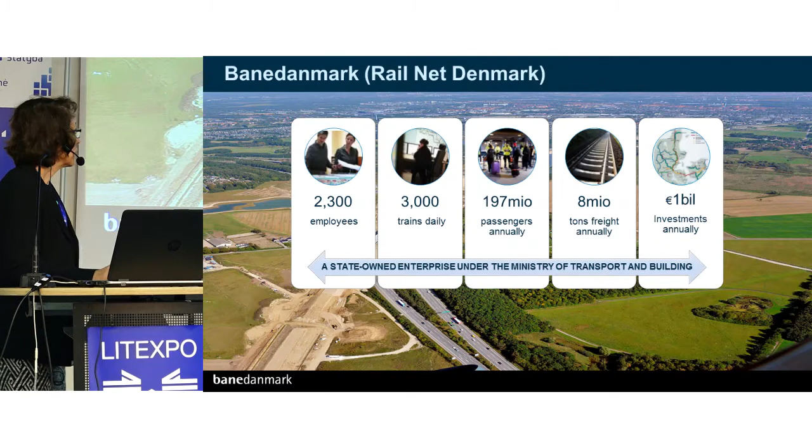First of all, a little bit about the Danish RailNet. It is a state-owned enterprise under the Ministry of Transport and Building. We have 2,300 employees and investments of 1 billion euro annually.

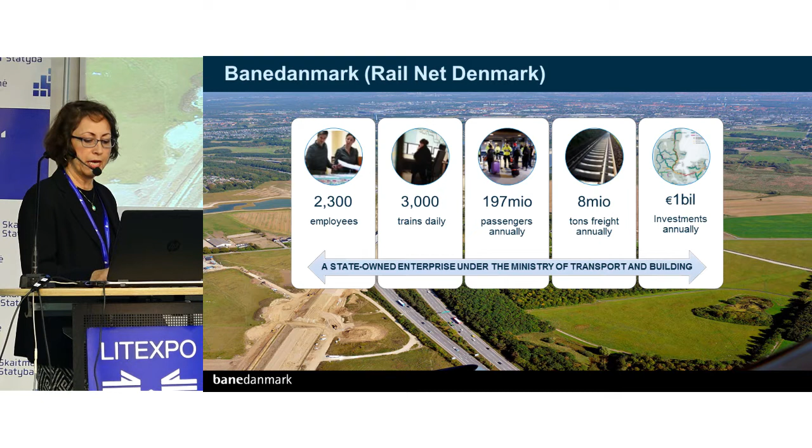We use the investments to make speed upgrades, new lines, and capacity expansions. Part of our railway is not electrified, so we have a contract to electrify the rest of the lines. We also have a completely new signaling system being established across the whole RailNet.

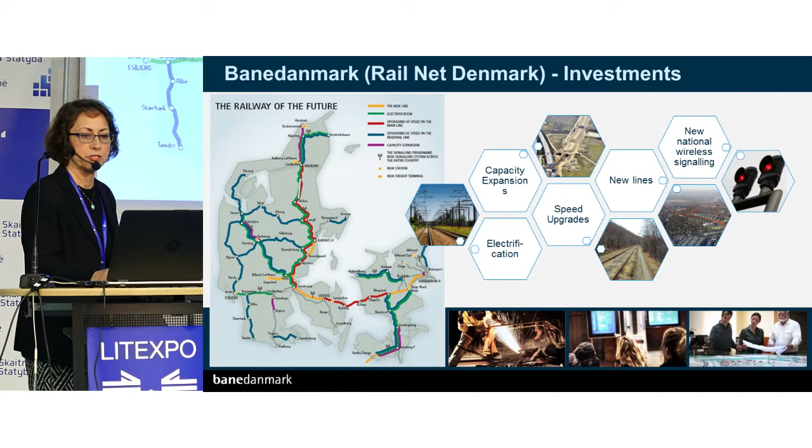One of the new lines was between Copenhagen, the capital city of Denmark, and Ringsted, which is a hub for the railways. It is the first time in many years we've made a new railway in Denmark. It is approximately 60 kilometers, dual track, electrified, high speed, 250 kilometers per hour. We have 4 tunnels, 88 bridges, and lots of earth to be dug.

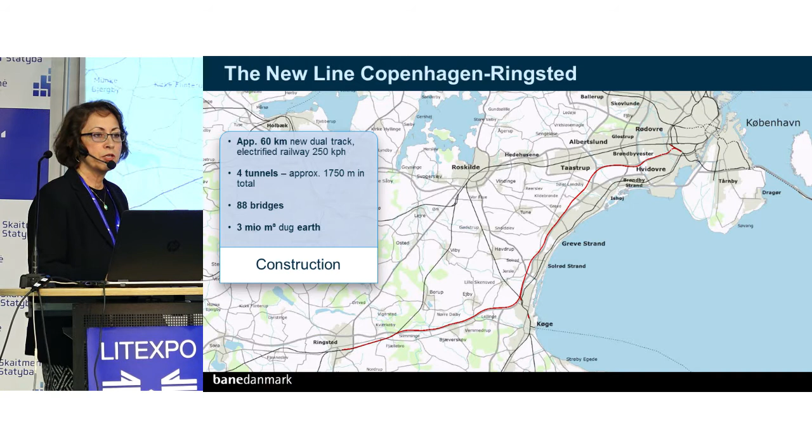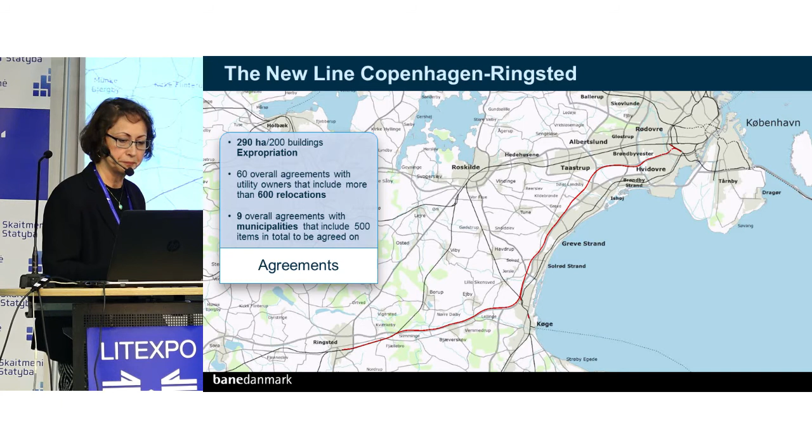We go through 9 municipalities, with lots of agreements with them, utility relocations, and lots of buildings to be expropriated. The only stop we have within these 60 kilometers is a new station, and then we have some platform works at both ends of the line.

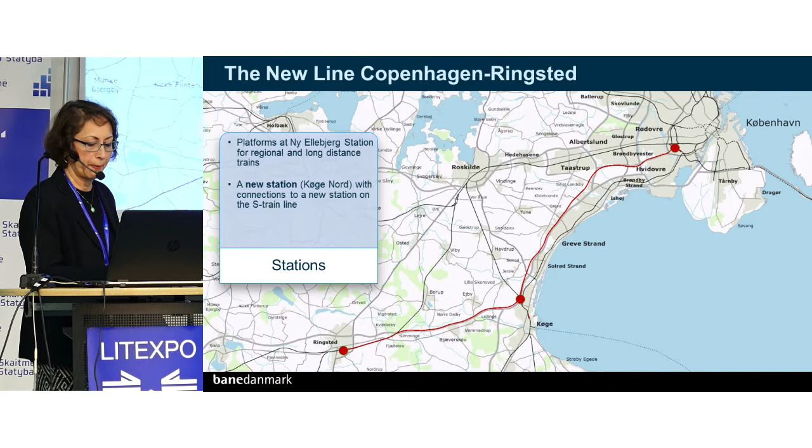The time schedule for the project: we started in 2010 with the Construction Act, and we have invited the Danish Queen on December 8, 2018 to open the rail. We have a budget around 1.4 billion euro. Today we are finished with construction works.

We have laid the tracks. Tomorrow we have a test drive, the first test drive of the whole line. Then the catenary and signaling systems are going to start now. We count on using most of 2018 for test and commissioning.

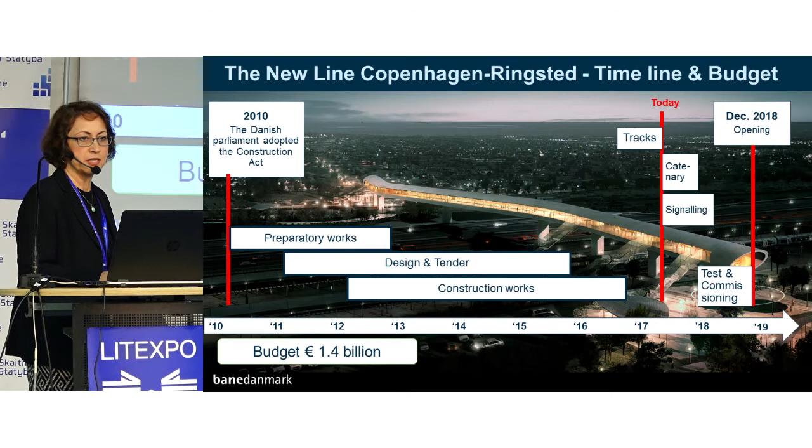When we started the project, we had a vision. We wanted to construct a new line, European and best-in-class, by purchasing in a competing market. We wanted to use the economy of scale and state-of-the-art technology. How to do that?

In many cases, we were first movers. It was the first high-speed line in Denmark. It was the first time we used design and build contracts, and the first time we used contract after negotiation in that type of project. It was also the first time we required exchange and delivery of intelligent 3D models through all stages.

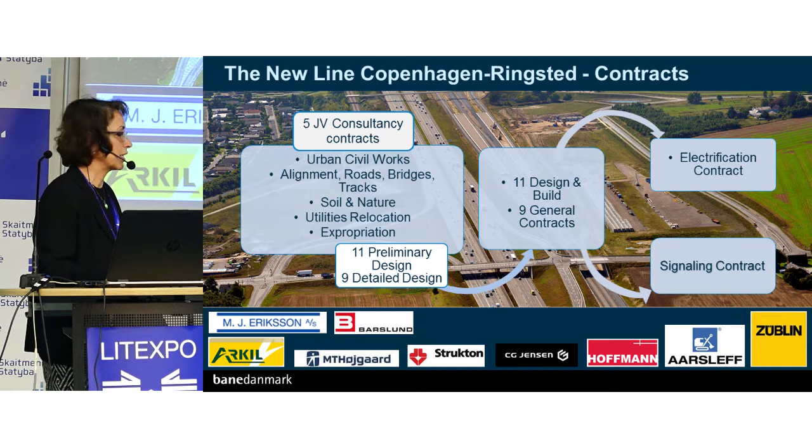Out of these 5 joint venture consultancy contracts, we got 11 preliminary designs in order to make a tender for 11 design and build contracts, and 9 detailed designs for 9 general contracts. Then, at last, the electrification contract and signaling contract took the material over to do their works. As you can see here, many of the major contractors are involved in the project.

The challenge was, when you have all these different companies delivering data to you, how are you going to manage that data? Are you going to ask them to work in a specific product? We didn't do that. We said, do what you're best at, but use the standards we have defined in order to exchange the data.

We made a CAD manual where we defined our standards. We made some automated processes to control the quality of the data delivered. We gathered all this data in our document management system, ProjectWise, and made some intelligent models out of it, iModels.

Out of this information, we were able to do all these different extractions from the models, making clash detection, visualization, exporting to our GIS system, quantities, setting out data, and drawing production. Everything was based on these models.

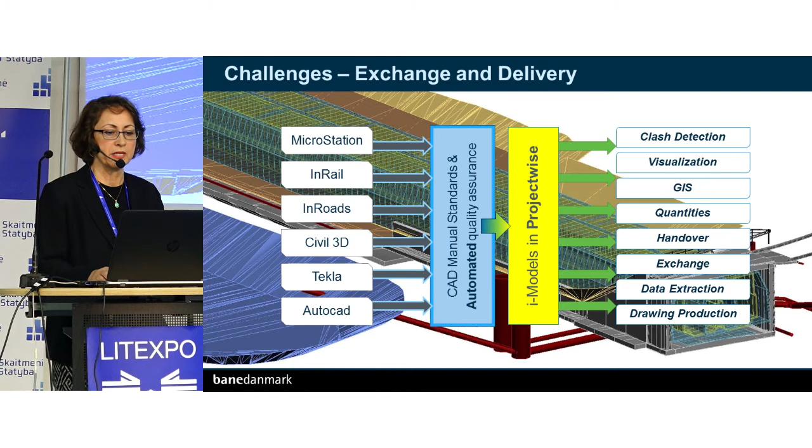Using this one source of data, we were able to do all these things, ensure consistency between the models, and ensure that the volumes were as they were to be defined. We used them for different purposes too.

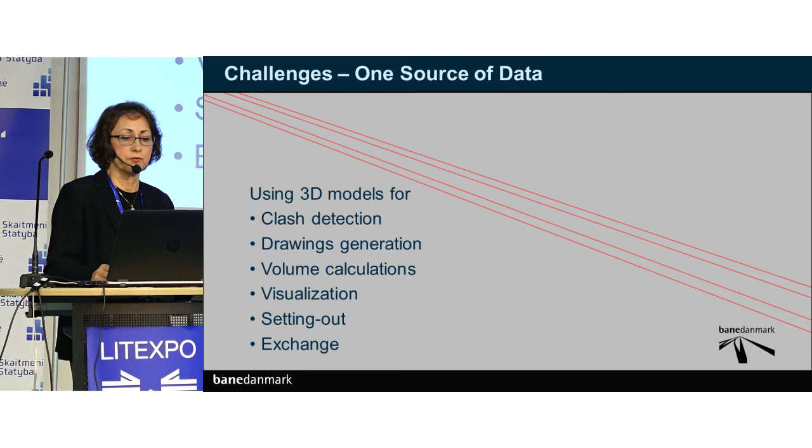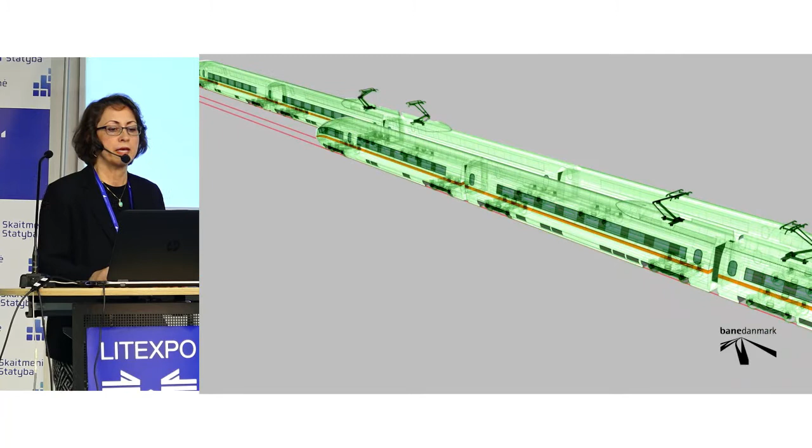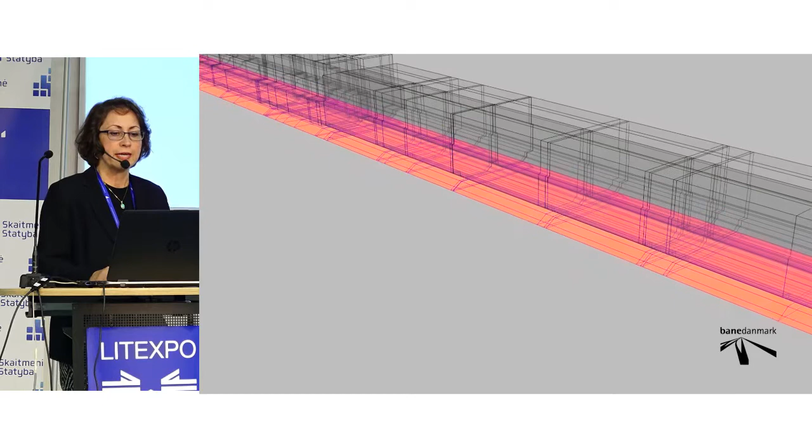The alignment of the railway was the center of everything. Around this alignment, we defined the minimum infrastructure gauge, which gave us the possibility to have free passage for the trains. Around this gauge, all the models were defined for utilities, for structures, for different types of structures, and earthworks.

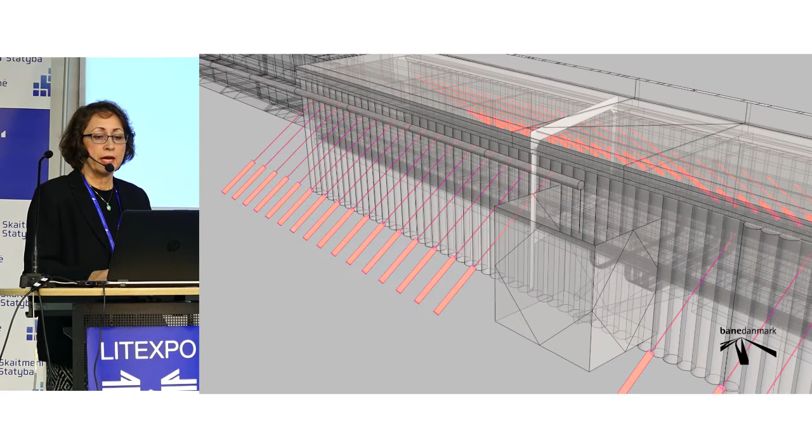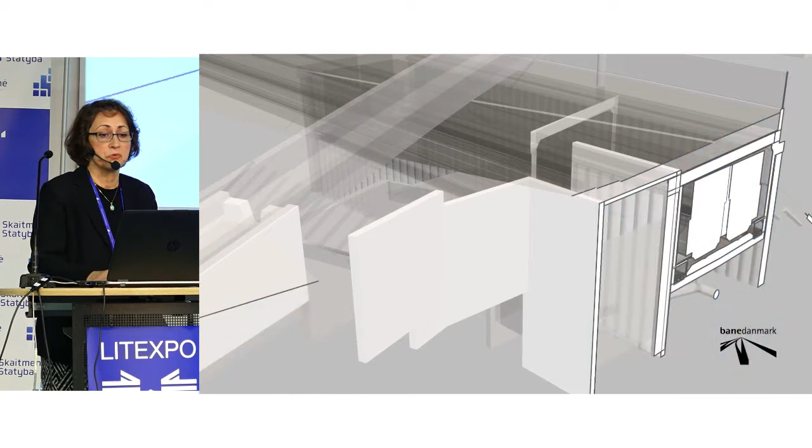When we gather all these models together, we are able to make any kind of analysis. One of them is to generate the drawings, make sections, and produce drawings from the 3D models, and use the same models as well for making visualizations.

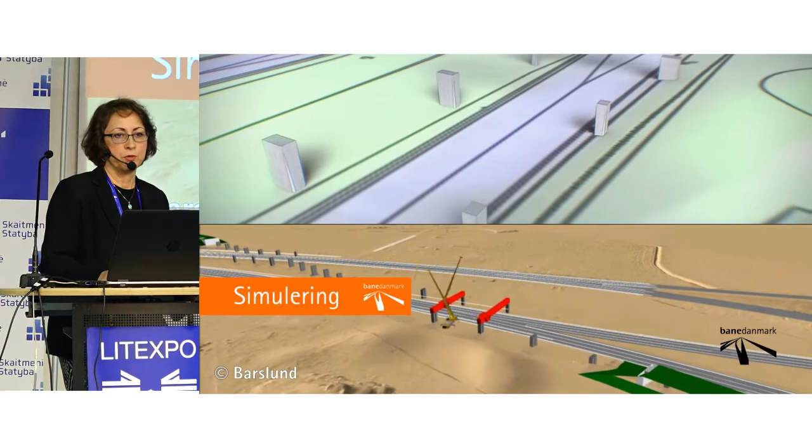A challenge is complying with time and budget in that type of projects. Having these 3D models, our contractors were able to make simulations of the building process and optimize their processes.

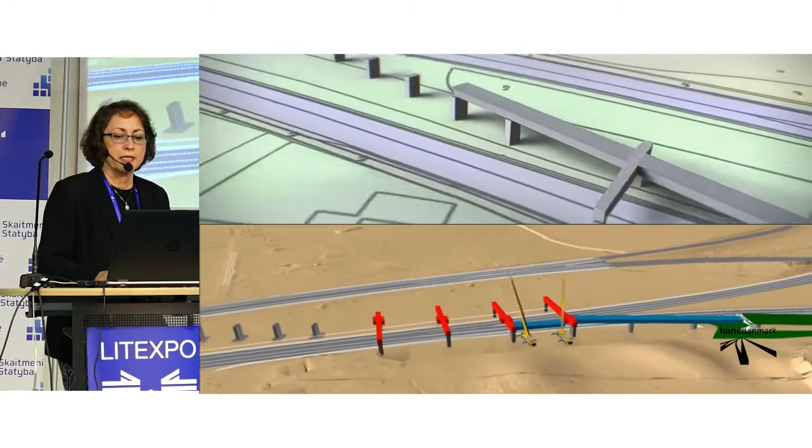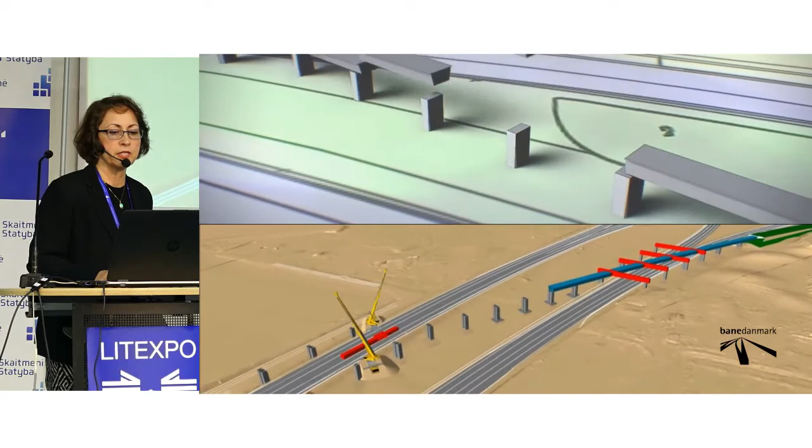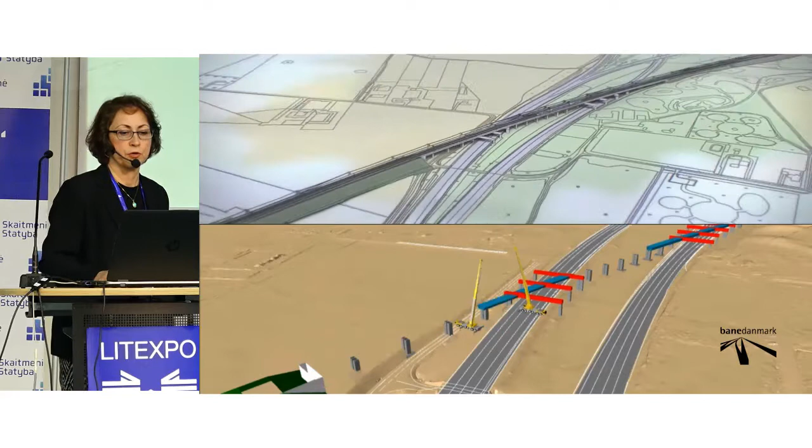The picture below is from one of our contractors. This is a railway bridge. Above, you see the same railway bridge, but it is a kind of visualization of the building process in order to give some information to the different parts of the project. And at last, when you have these 3D models, you can of course visualize the final project.

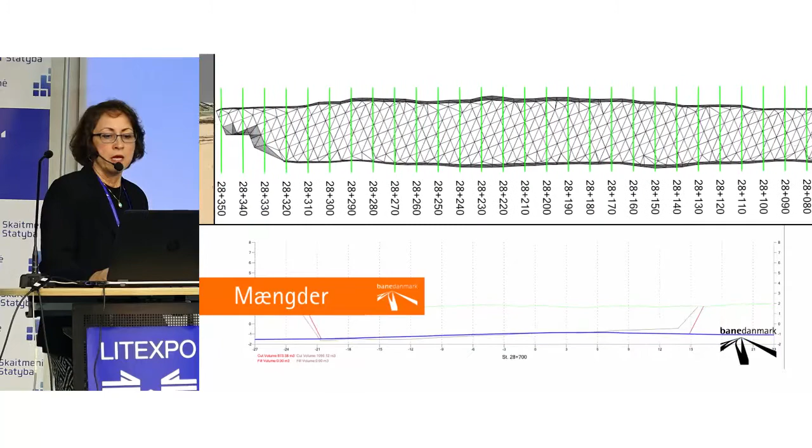Another challenge is documentation of quantities. Having the 3D models, it is possible to make any kind of calculation and compare the volumes.

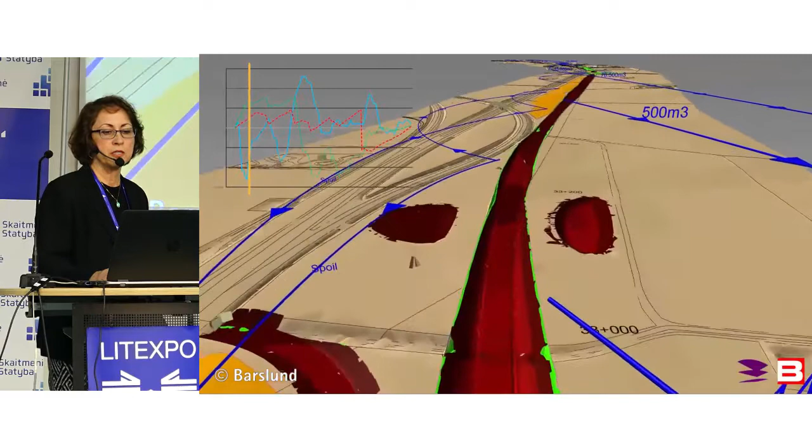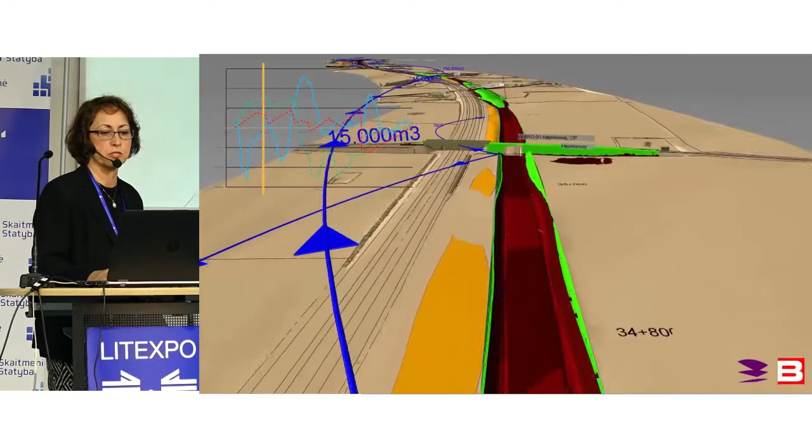Another way to use the 3D models is how you relocate all these earthworks. The visualization here is made by one of the contractors within the tendering process. The contractor didn't get the project, but that's what we got during the tendering, during the bidding process.

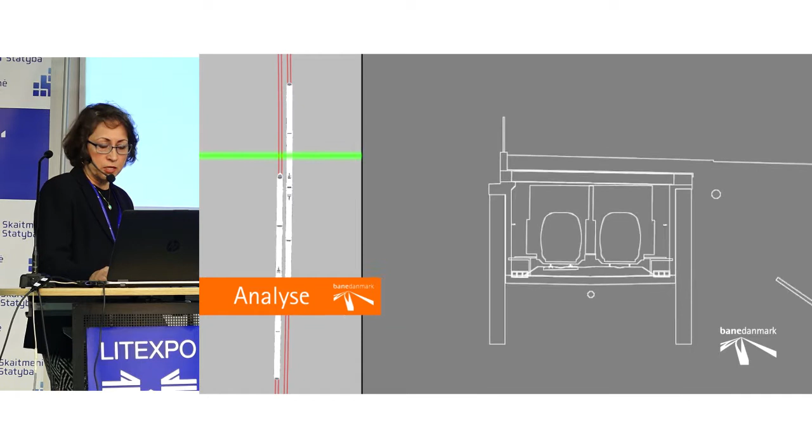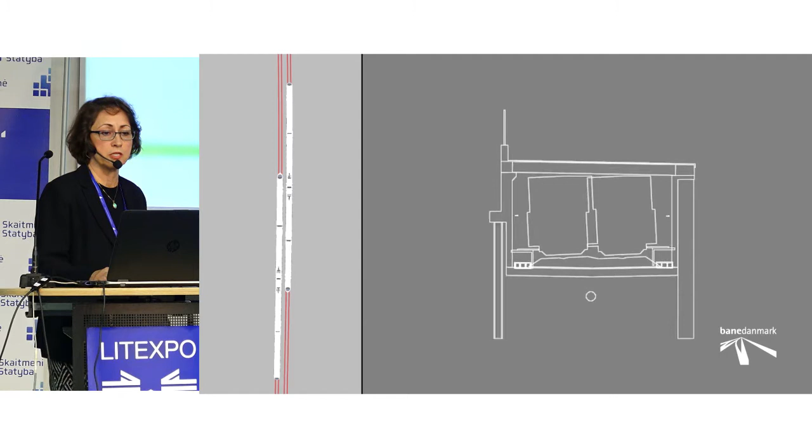Consistency control is one of the other challenges. Having all these 3D models gathered together, you're able to make any kind of analysis. This one is a cross-section each 1 meter all through the line, and then you can check the consistency of the models.

Another challenge in railway projects is to ensure safety and interoperability. Having these design and build contracts, it means that the contractors and consultants working on this project were only working on civil works, so they didn't have any information about the different railway objects. So in order to get through the processes with our assessor, we defined requirements for free passage of the trains.

Based on these requirements, we made a 3D model of the minimum infrastructure gauge, and then using that, comparing with all the models we got from our consultants and contractors, we were able to generate clash reports. The clash reports were used as documentation for free passage. So if we didn't register any clashes, that was documentation enough to say there's enough room for the trains to go through. It's actually the first time this method is accepted by an independent assessor.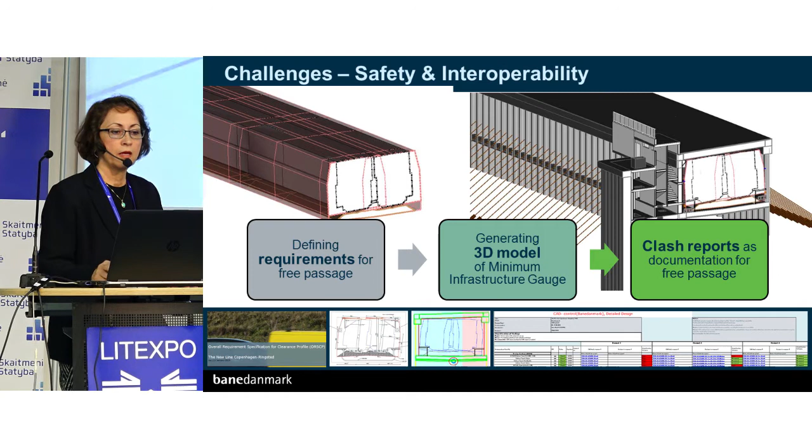One of the benefits we got out of these 3D models was for simple visualizations, in order to tell the bidders what they are going to build, and to tell authorities what is going to be built.

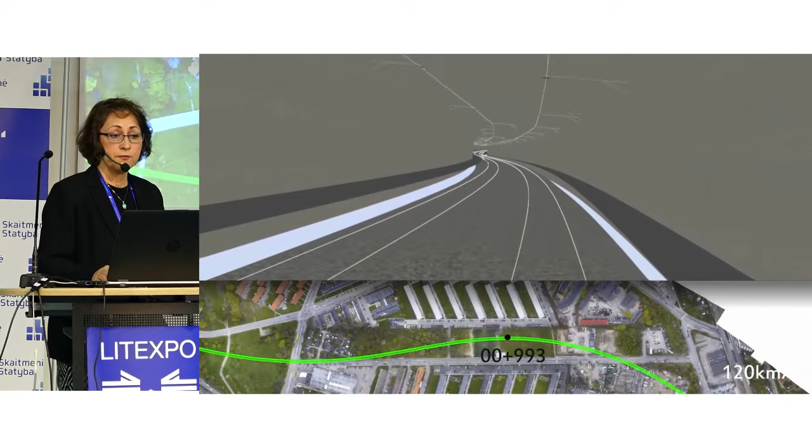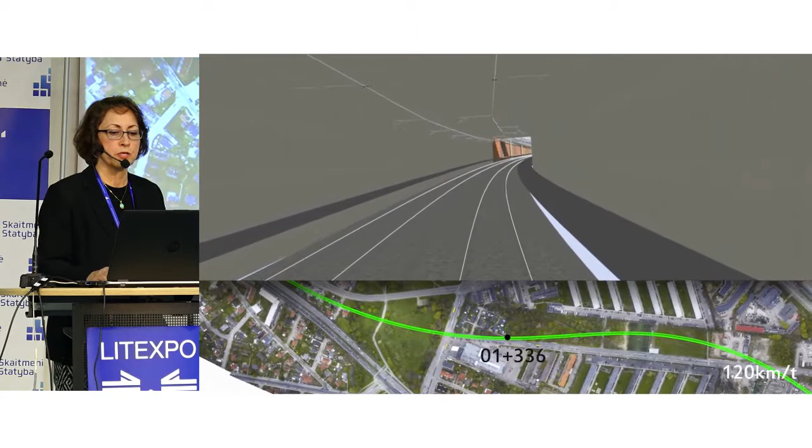Another benefit is information to other projects. We have our electrification and signaling project. This animation shows the line from the driver's eye above, and the one below shows where in the line you are and what speed they are going with.

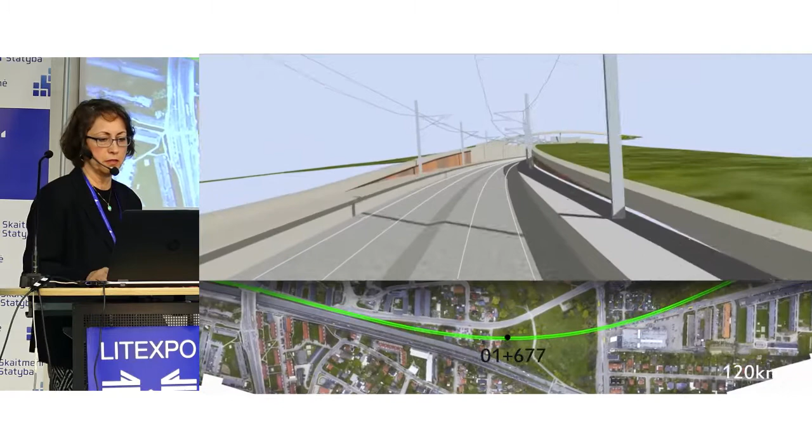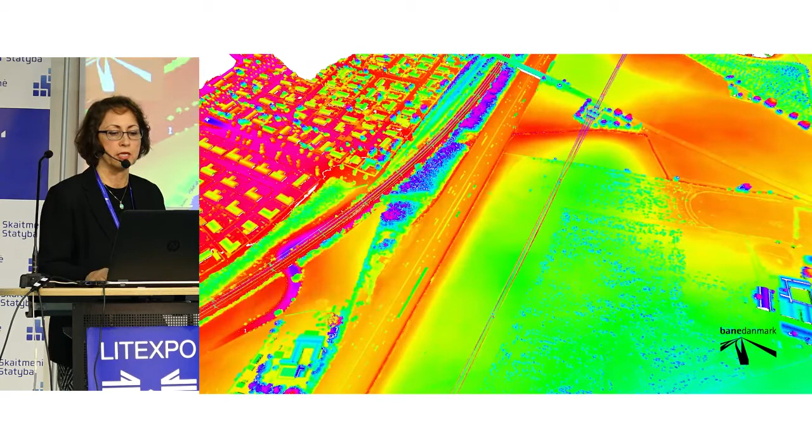And then we made laser scanning of these 60 kilometers all the time. Normally laser scanning is used to define a terrain model, but what we did use these scannings for was to make a kind of visualization.

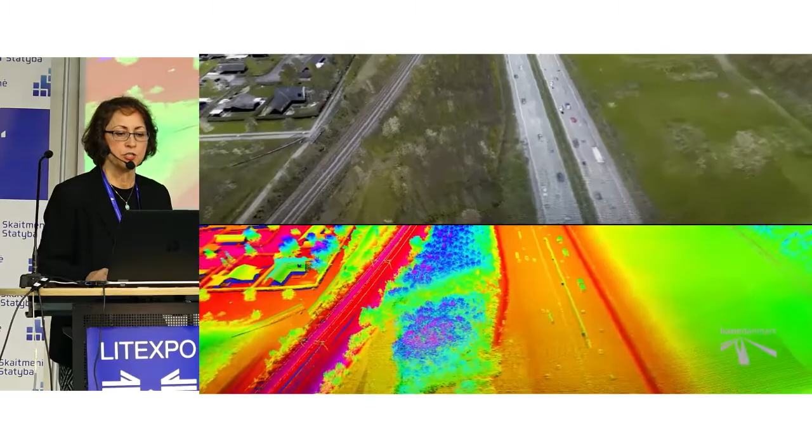We developed a program which could convert the 3D models to point clouds. Putting the point clouds together, you have the visualization. And the case is that using rendering with point clouds, it is at least 10 to 20 times quicker to make animations, and it gives a complete understanding of what we are going to do.

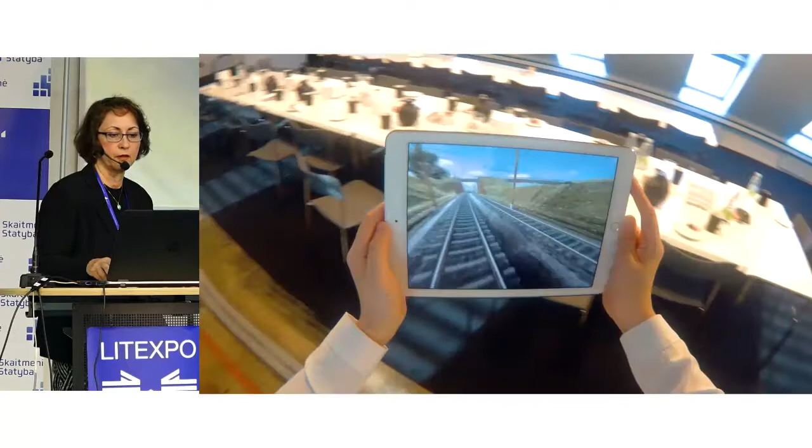The picture below shows the new station which is going to be built. We put all these models into a 360 degree video.

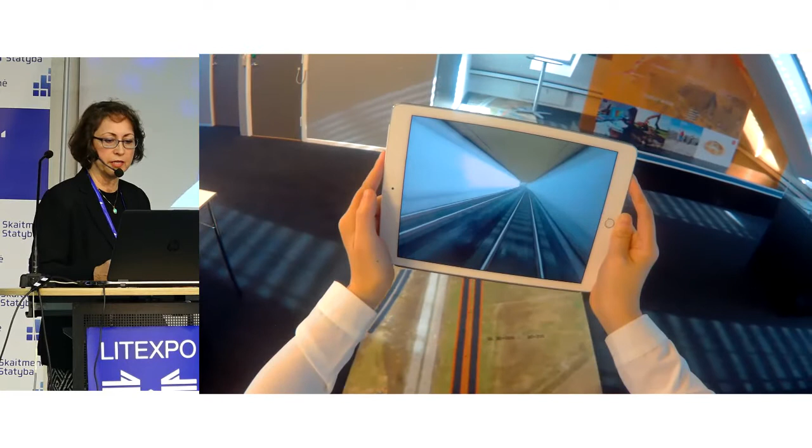So while the train runs at the necessary speed, you can go around with the iPad, up and down and right and left, and then you can see the line from different perspectives. This one is available on YouTube, and everyone with an iPad, iPhone, or Android can go through it.

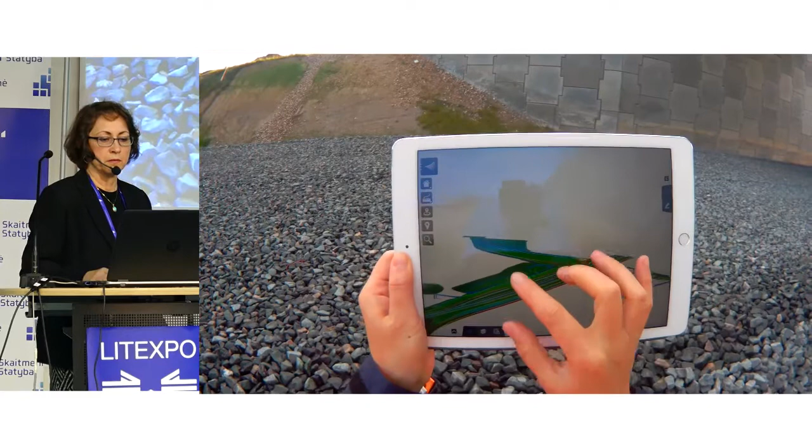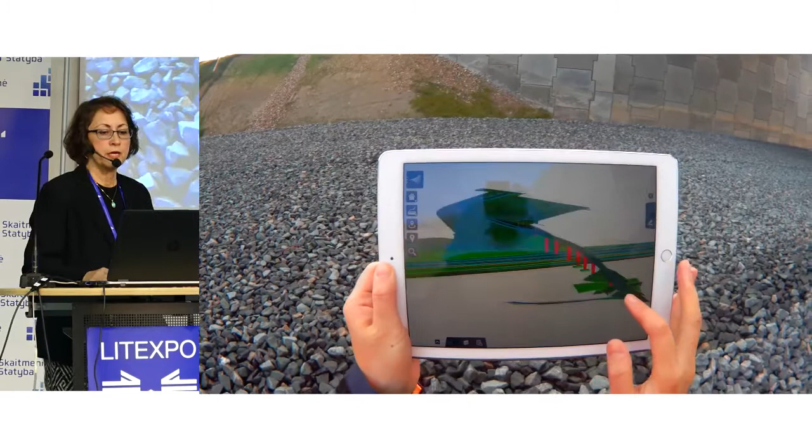Supervision and inspection using 3D models was one of the other things we developed. There's an app where we put all these 3D models, and it has GPS, so you can take it to the site with you and explore the models.

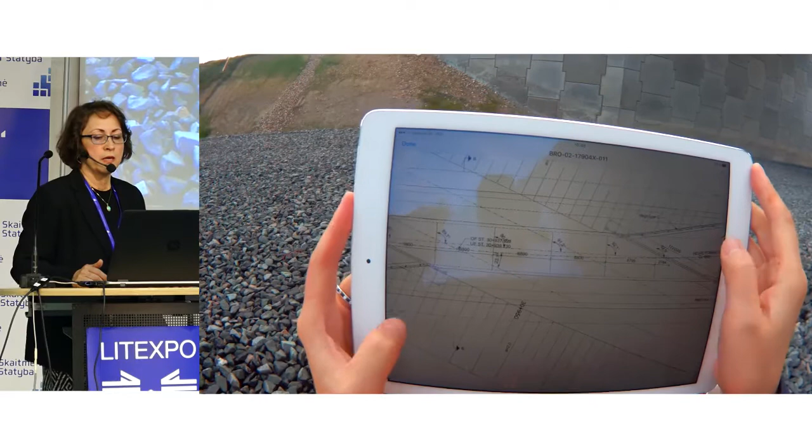We have put some links on the models. In this situation, there's a bridge, and there's a drawing, and you can just push the drawing on the iPad to see the information about the bridge. Then there's a data list, for instance in this example, where you can see more information about this bridge.

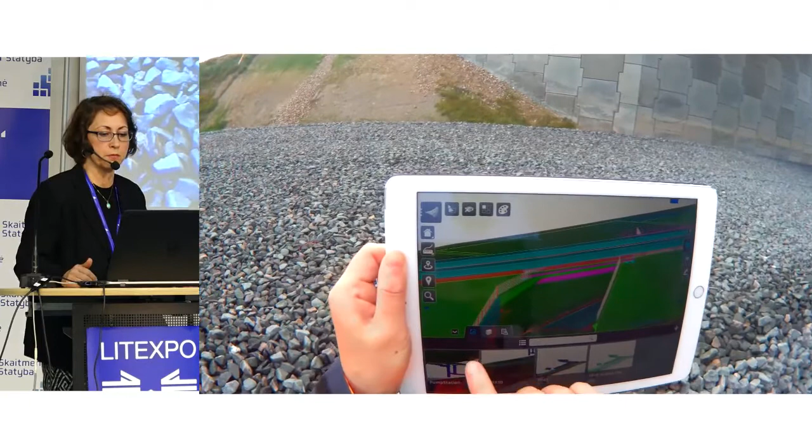What you're able to do now is have different views in the same model. So here you go through and find a pump and find the specifications about the pump.

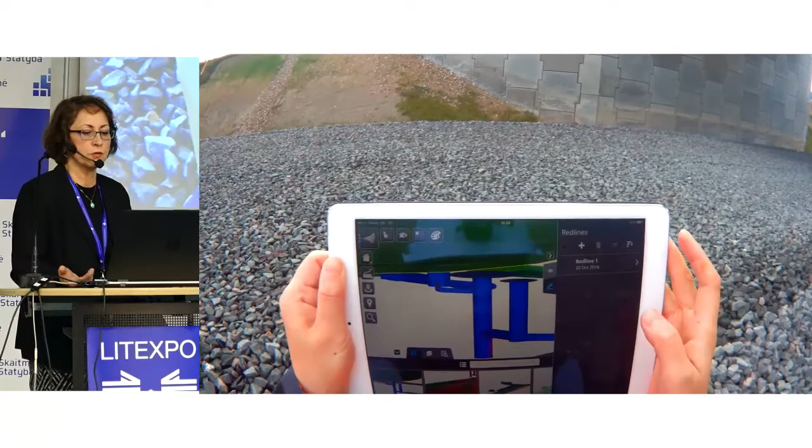And what you're able to do too is if there's any kind of object information in the models, you can get it here in the same application. You're able to make some redlining, take some pictures or notes, and put it on the model. When you go back to the office, you can use them to correct the models.

We have gotten many positive responses from the industry. Some of them say 3D reduces the risks and ensures the quality. It is an effective tool to manage the interfaces. And having seen the models in 3D, you can't do it another way.

Using 3D models for tender means more clarified tender documents, which means reduction in risks. Reduction in risks means closer prices within the offers, and it means you're able to compete on solutions and not only on prices.

95% of all our contracts are signed totally 9.3% lower than estimated. We are on time, and we have reduced our reserved budget from 15 to 10%.

All the experience we have gained has had a huge impact on the whole industry. We now have a collaboration between the major actors in the industry with the Danish rail and road authorities, the association of consultancies and contractors, as well as the clients for the Femern Belt, which is the tunnel between Germany and Denmark. Together we are trying to define some national standards for working with infrastructure projects.

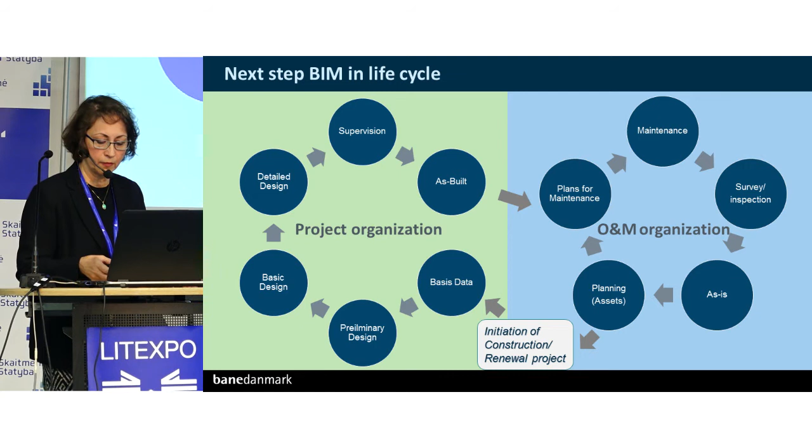When you're within a project organization, what you need is buildable and traceable project data, and use it for different purposes - for simulation, visualization, consistency control, or all these different processes which give you the possibility to build the assets.

But as soon as you're finished with that and deliver this rich information, rich data, to your operation and maintenance organization, what you need is to use it as the unique source of data, for different purposes which are needed in your operation and maintenance organization.

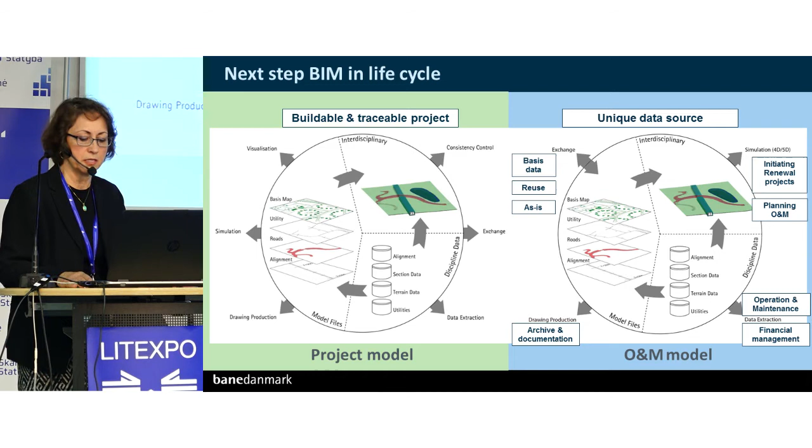Financial management, initiating the renewal projects, planning your operation and maintenance, keeping them updated as-is, and then archiving the documentation.

So what we did as an impact of this project was that today we have 20 other projects in Banedanmark using the same standards, using the same working methods. We have defined a strategic project which is called the Digital Railway of the Future.

The mission of this project is to define the level of intelligence in our CAD models, and define optimal data flow between the different asset management systems we have in Banedanmark.

Transparency in our requirements when we say to our contractors or consultants what type of as-built documentation is required. And then defining a logical object structure and classification system which applies to our needs in asset management.

Reduction in redundant data - having so many different systems for our asset management, there are copies of copies of copies. We need to remove them, to have one source of data, and then use the 3D models during the whole life cycle.

To do all that stuff, we need some preparation in our organization. That's what we've worked on for 2 years now. We are quite ahead, but we still need to do some work.